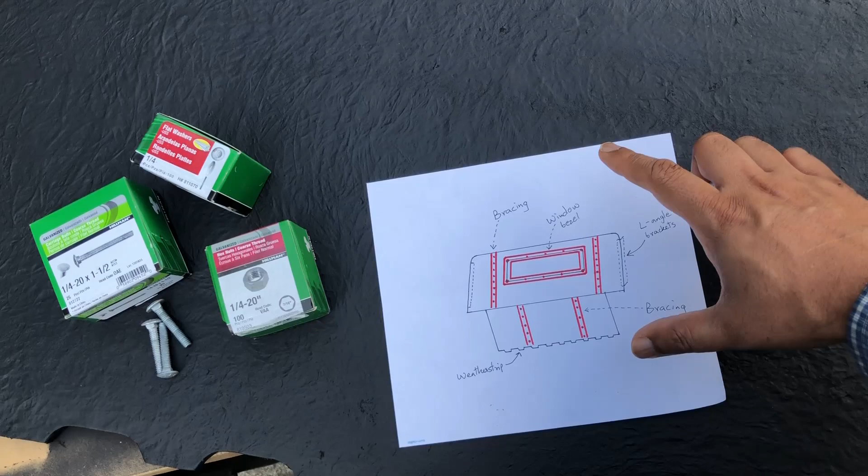At the end of my last video, I showed you the plan for part 3, where I'd be making accent strips on the backs of the rear curtain, top and bottom. And those accent strips or braces would be held in with these carriage bolts.

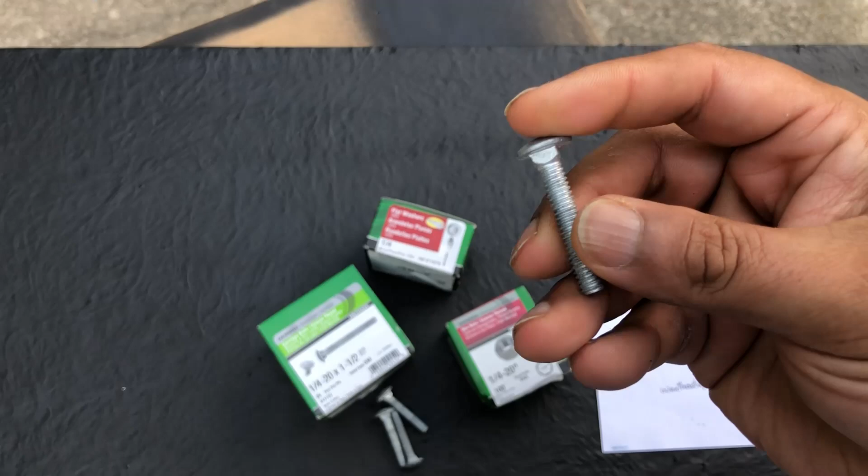So I got a bunch of carriage bolts from Lowe's. These are the domed top ones, and they have a rough texture, so they'll hold paint really nicely. If you want to have a look at the ones to buy, these are the 1.5 inch long carriage bolts, and those are 1/4 by 20 thread pattern. I also have washers, 1/4 inch, and 1/4 by 20 nuts.

I got these grooves into the lower part of the rear curtain, and I'll be using this auto and marine rubber weather seal. You can see it's nice and soft. So I'll be putting the rubber on the insides, and I'll be putting another set of that rubber on the bed itself, so that both of them press together and create a good weather seal.

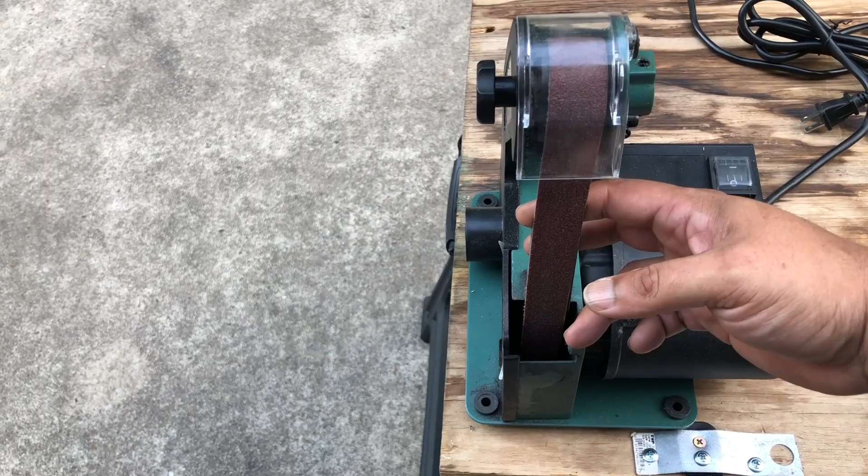All right, ready to do my cutting. I got my little 6-inch cutoff saw over here from Harbor Freight. It's really simple, just meant for cutting thin tubes and metal strips and stuff. It has a 6-inch cutoff wheel, and I also have this little belt sander for small stuff, also from Harbor Freight. They make some cheap tools, but if you're not using them for any industrial capacity, I think they're just perfect.

Now this is the metal strip, an aluminum strip that I bought from Lowe's. Let's have a look. So it's 1/16 by 1.5 inches, 8 feet long. It's aluminum, about 1.5 to 2 millimeters thick. It's just perfect for the accents and the bracing that I need.

If you look at the end of this, you'll see a little burr, right at the end. So I need to sand it down a little bit, and I think I'll use the little belt sander for that.

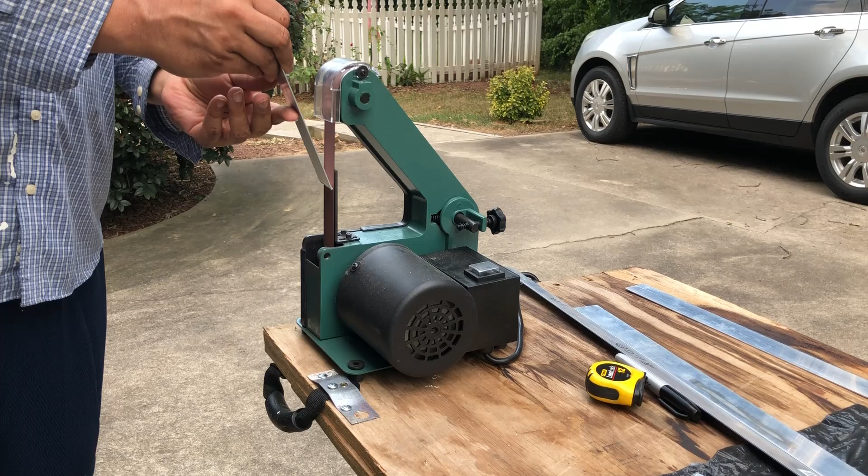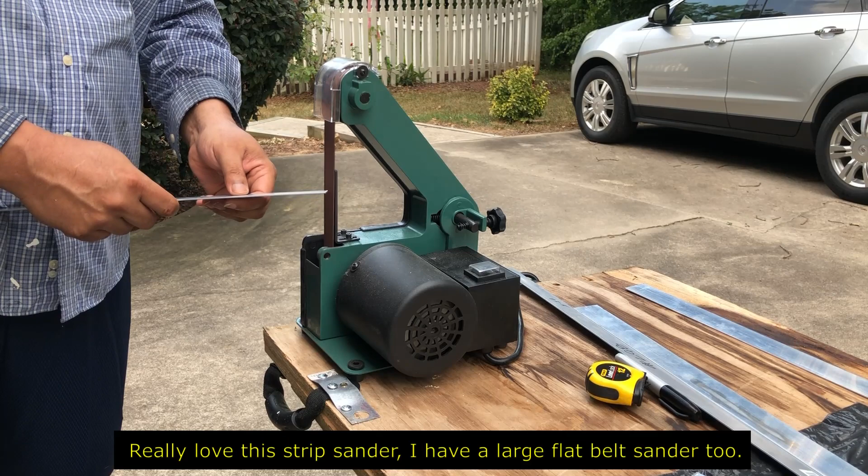There you go, not sure if you can see it, but it's perfectly smooth now. No sharp edges.

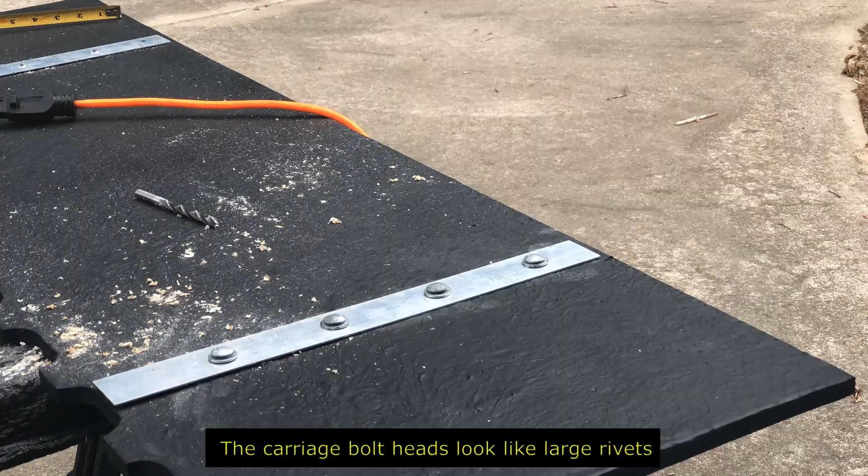I'm also using a little clear RTV silicone sealant on the inside to cover the inside of the holes, and then I'm going to torque it a bit tight so it seals up nicely.

This is how it looks on the back side. Very nice, these accents look really good. I added a small screw over here because there wasn't spacing enough to add another bolt. So this screw is just going to hold down the edge of the strip. Once I paint it over, it'll look okay.

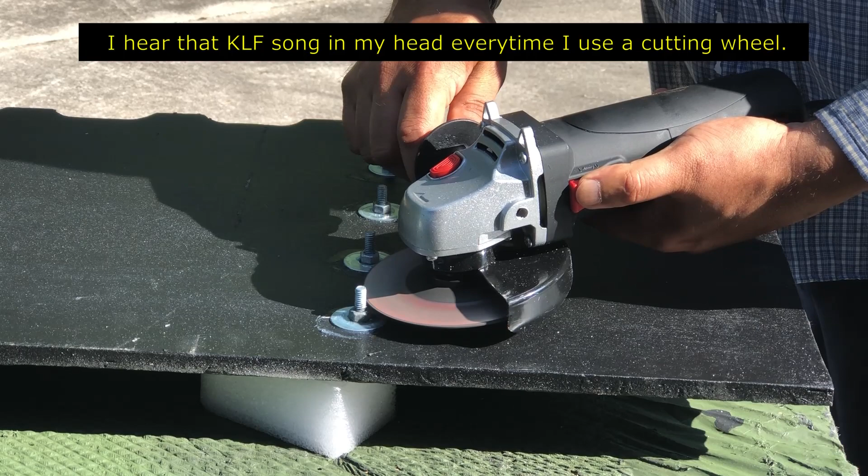KLF is gonna rock ya.

KLF is gonna rock ya.

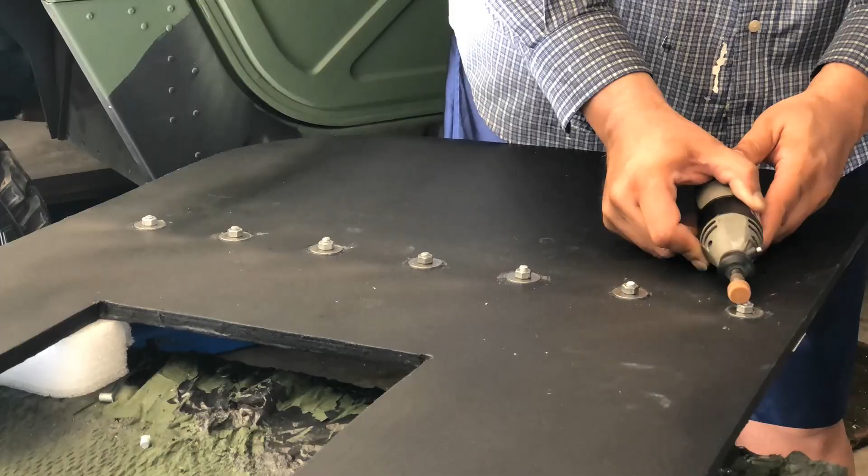So yeah, if you look online, there's a whole bunch of rear curtains in different shapes, sizes, materials, and prices. I'm just happy that I got a chance to look at all of these and wanted to see if I could design my own. I think it's turning out quite well.

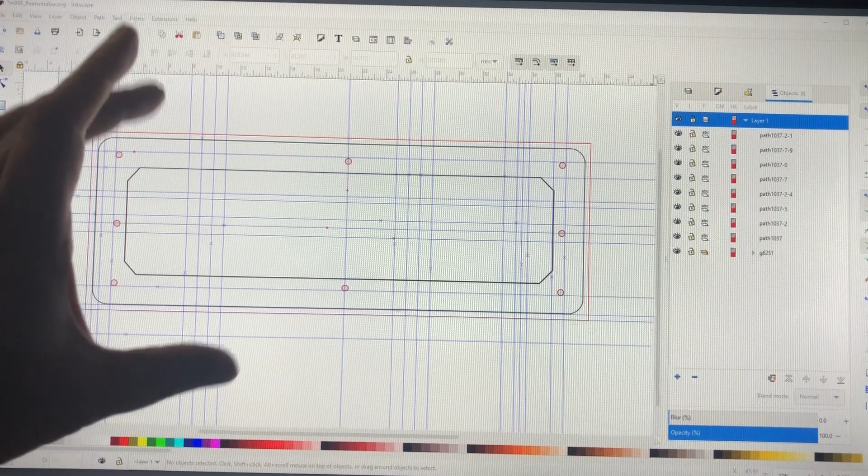And here's what I designed. I threw this up to scale on Inkscape on my computer, and I'm having it laser cut out of stainless steel and delivered. It should arrive in a day or two, and it has space for bolts and stuff. I'll be mounting it on the rear curtain, the top part, putting the bolts in and inserting the glass on the inside.

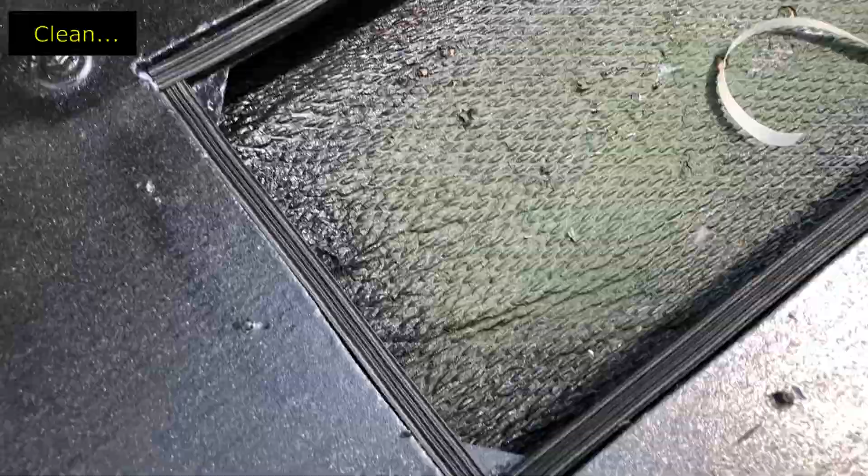I'll be using an L angle aluminum piece about 17 inches tall to bolt the top part of the rear curtain to both sides. Let's look at the piece here. I got this from Lowe's, for those who want to buy one, this is what it is. Aluminio - I love when they have it in Spanish too. All right, I'm gonna cut pieces.

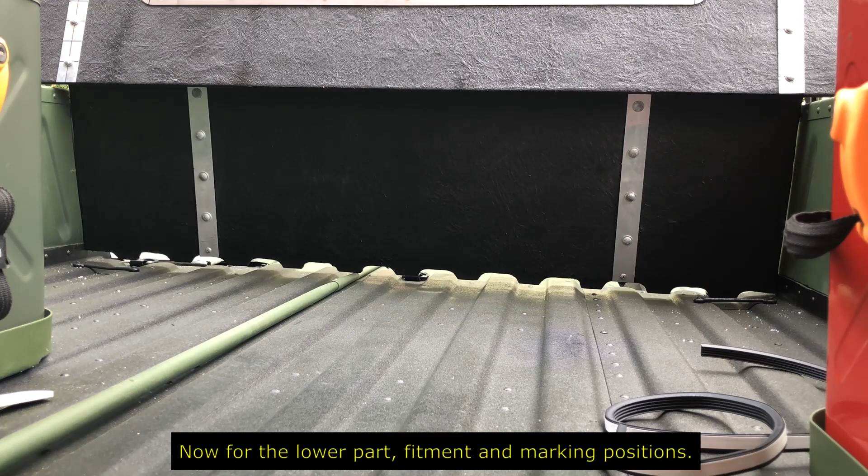The bottom part is in place and I just need to put in the weather stripping at the bottom and then bolt it in on the sides. The top is fully installed, weather stripping on the inside.

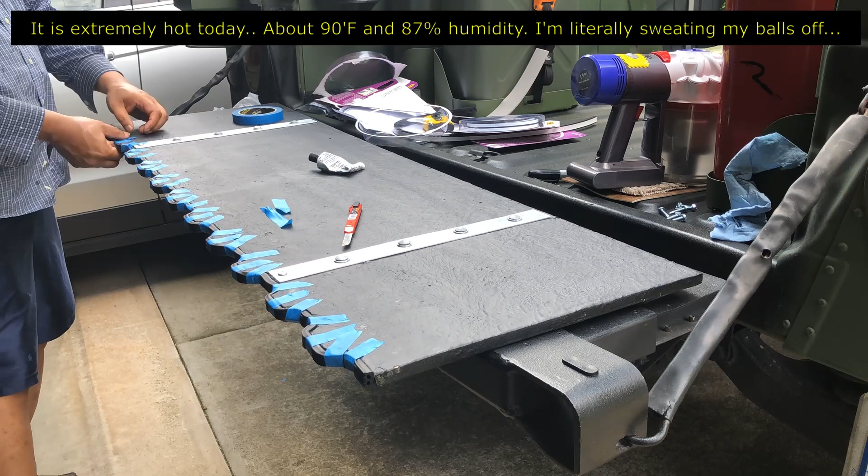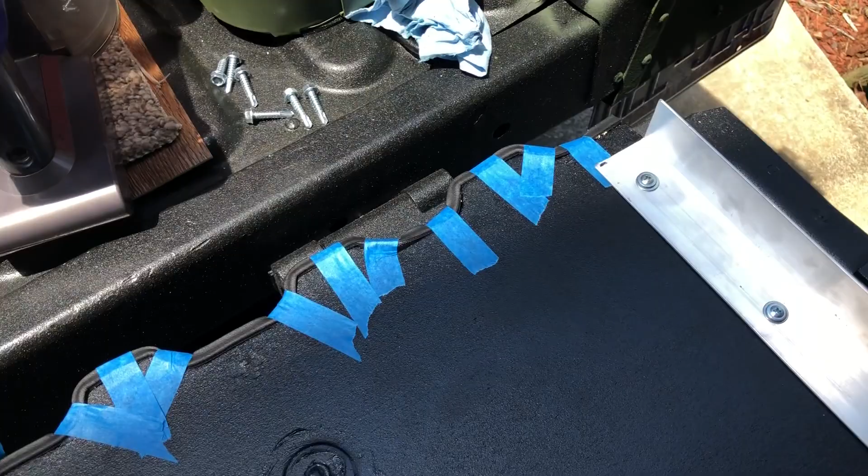While the weather strip was drying, I installed these two side brackets. I bolted them in with 1/4-inch screws, and I'm going to bolt the other side onto the sides of the fenders there.

All right, so this is installed. The weather stripping is looking good. It's installed from the inside.

I think all in all, this came out quite nicely. I'm very happy. Took me a little while to do and 3 videos, but I think it was all worth it. The next video is going to be a paint video for the hood, that'll be fun, and then we get to install the gun.

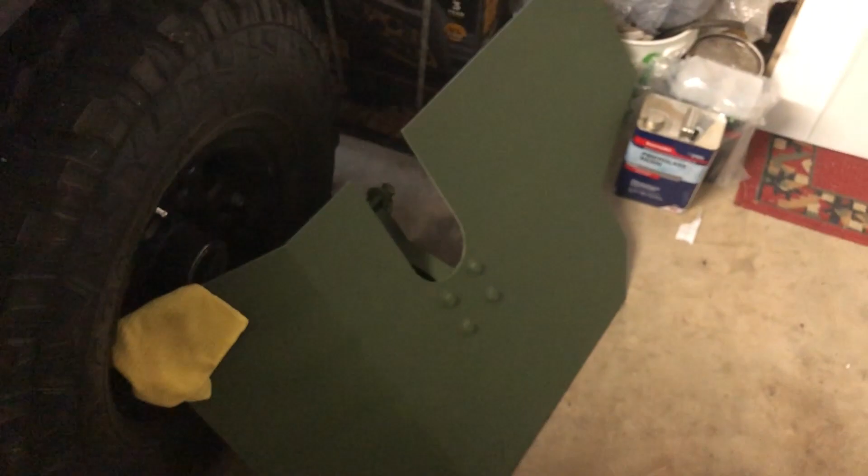So the big question is, how much did all of this cost? Let's do a cost breakdown, shall we? The fancy ass plywood was $60, $30 for the angled aluminum, $28 for the aluminum brace, $150 for all the fiberglass materials, $128 for the laser cutting, $34 for the weather strip, $25 for the glass, and $45 for bolts and hardware, for a grand total of $500. Now, isn't that much better than $2,000?